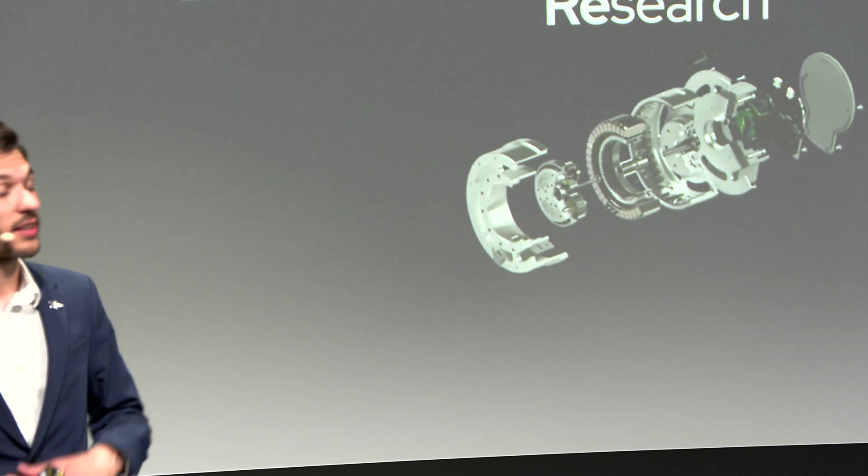2024 was also a year of drastic changes for the association with the creation of 2 new poles that broadened our perspectives. And so here we are now. The association is organized in 3 distinct poles that complement each other and enable a progressive learning experience for our members. The Xplore Challenge, our education pole, the European Rover Challenge, our international competition pole, and finally, the Xplore Research for advanced research projects in partnerships with industry and academics.

Throughout these poles, we aim to bring together passionates, willing to build and learn together, who also have an interest in space exploration and rovers. Thanks to our initiatives, we train the next generation of engineers to be proficient in real-world scenarios. They gain a true hands-on experience that forges their capacity to play a key role in the teams that they will integrate and be autonomous. And we see that this has already borne fruits.

The experience they had at EPFL Xplore allowed many alumni to integrate top-tier companies and institutions for their internships, master theses, and jobs. And this trend does not only apply to space-related fields, but to a wide range of engineering domains, thanks to the diversity of our team. We have more than 120 students contributing each year, coming from 5 institutions with more than 12 different specializations represented, ranging from robotics to electronics through economics, just to name a few.

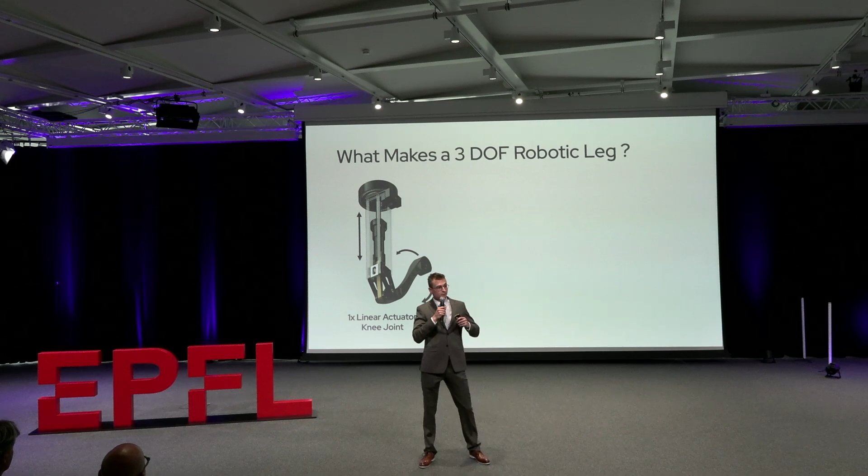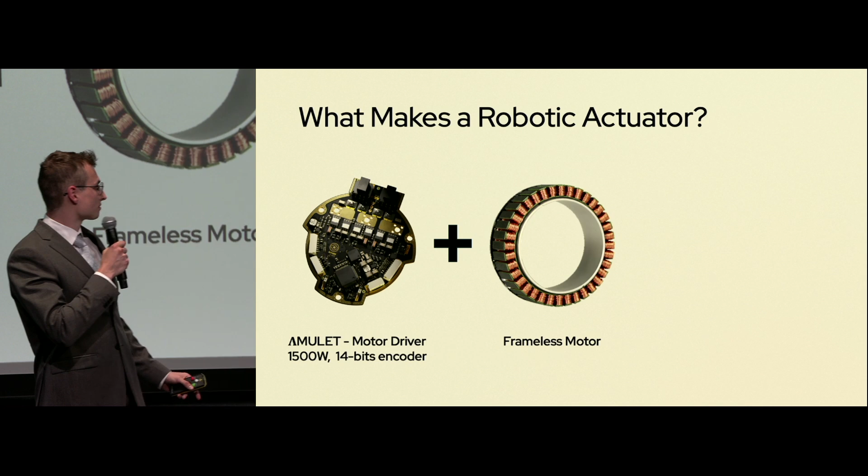So now the next obvious question is, what actually is a rotary actuator? Well, it's composed of 3 main parts: 1 custom brushless DC motor driver with an integrated encoder, 1 large frameless hollow brushless motor, and 1 reduction system, in our case, a single-stage planetary gearbox. You bring everything together in 1 single custom enclosure, and you get a rotary actuator.

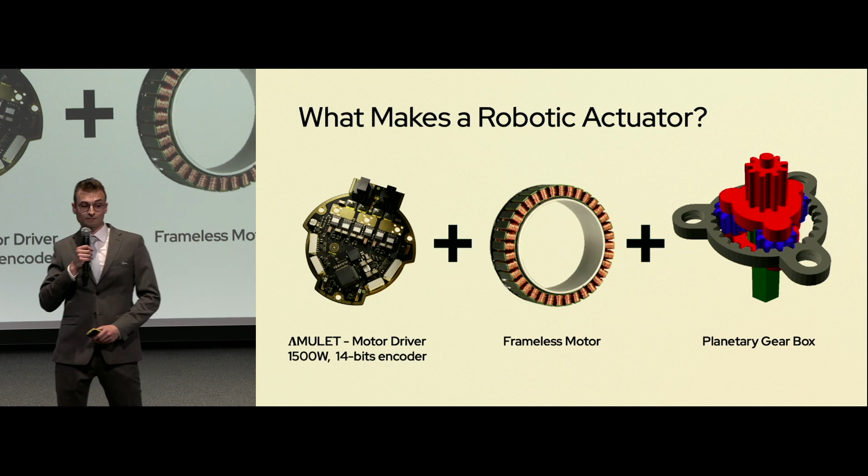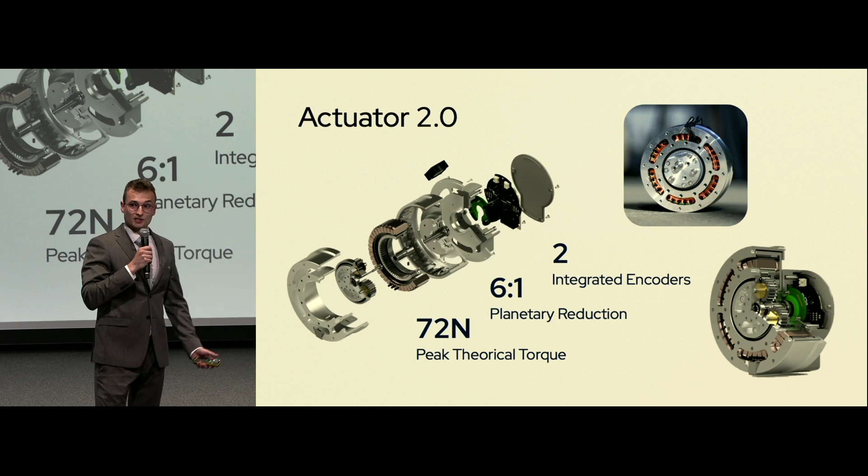But then you might ask, what is a new actuator without a new leg? So that's exactly what we did, and we built a new leg. So say hello to leg 2.0, a ball screw leg entirely machined in-house by students, 50% thinner than the previous iteration and 700 grams lighter. But most importantly, it is now pretty much backlash-free.

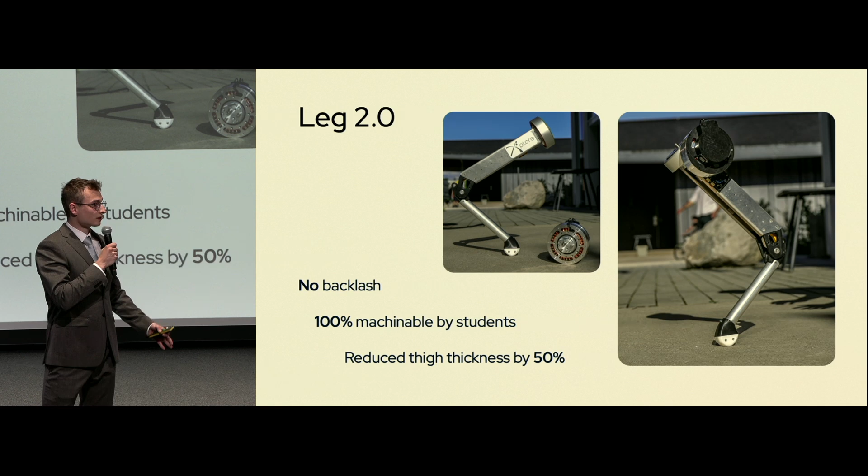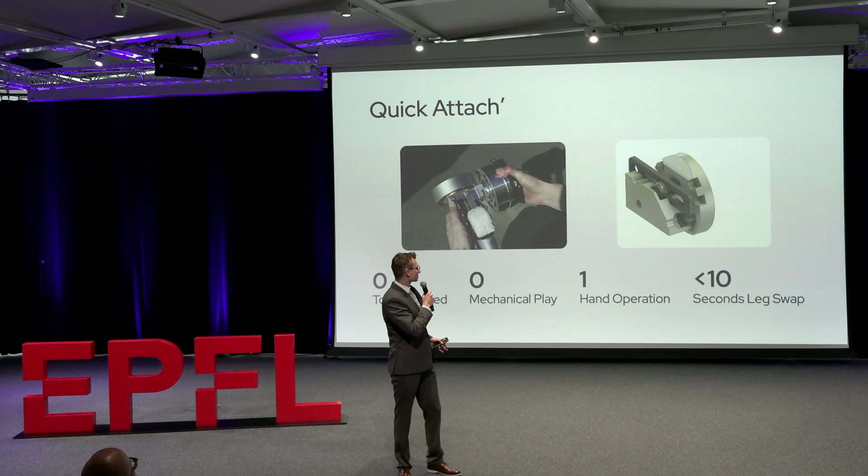And after building this new leg and this new actuator, the next challenge was to connect them together. And this is when a very talented student came up with an interesting idea, a quick attach system. This clever system is actually inspired by some 3D printers, and it allows effortless connection of the leg to the hip actuator by just plugging it in. You don't need any screws nor any tools. You just plug the leg, the power cables, data cables, and that's it. You're good to go in just a few seconds.

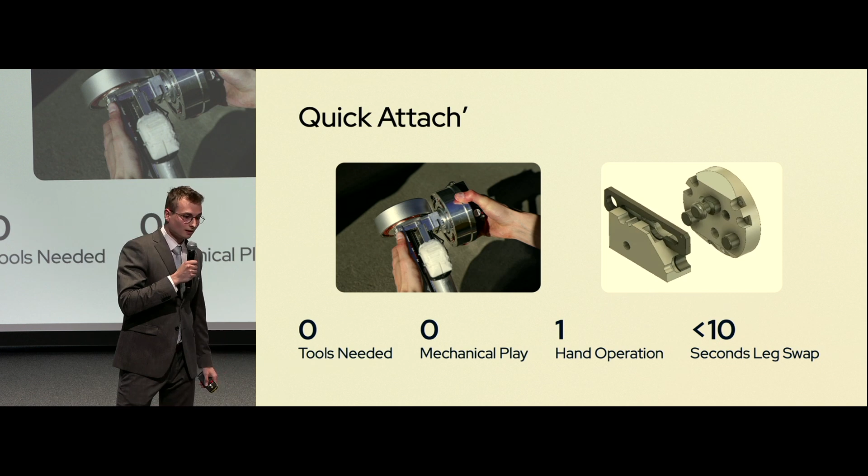And this system provides a strong and rigid connection, and like the rest of the leg, is entirely manufacturable in-house by us with traditional machining techniques. But that's not all. We also worked hard to develop the final piece of the puzzle to have a fully custom power system going from our batteries to our motor drivers. And now I'm happy to present you Battman, our new battery manager. It is designed to allow safe discharging, charging, and storage conditions of our batteries, and is powerful enough to accept up to 10-cell batteries for a power-hungry legged robot, but is also small enough to fit on the smallest battery packs.

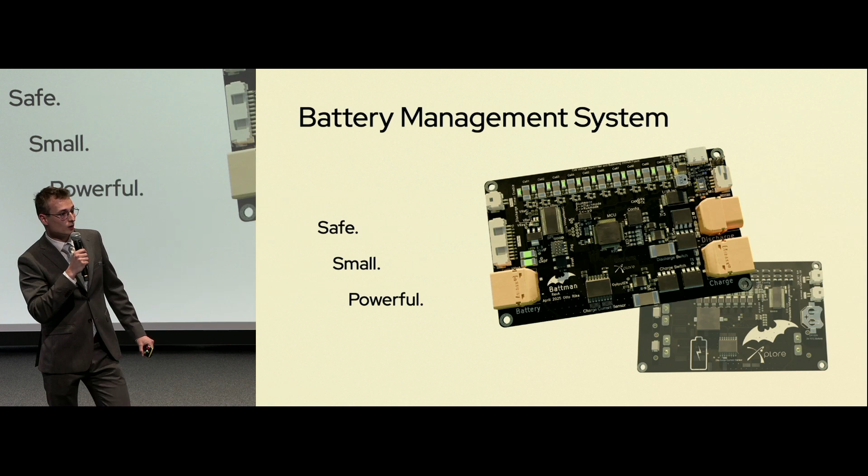But at Xplore, we're not only about building cool, fancy actuators and fancy tech, but also sustainable ones. And this is why I would like to welcome on stage Giovanni Aragna, who will tell you more about our plastic recycling initiative. Thank you.

Thank you, Theo. Now, let's finish this research pole with the Recycling Plastic project. This project was born from the idea that we could reuse 3D printed parts that were obsolete to create new filament. Its objectives were to be low cost, open source, and yet produce high quality filament. The machine works as follows. You first have a 3D printed part that you shred. After that, you dry it, and you put it inside an extruder. The melted filament that goes out is cooled by water cooling, and the diameter of the filament is measured at the end. After that, you have the new filament that is pulled and spooled.

This year, we aimed at implementing a closed loop between the diameter sensor and the speed of the spooling to better control its diameter. Uniformity of that is required by the printers. We also improved the spooler and wrote the software to control it.

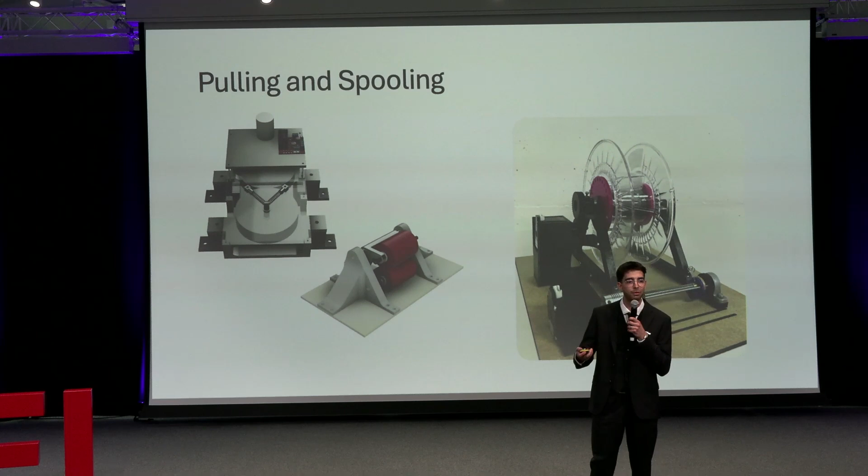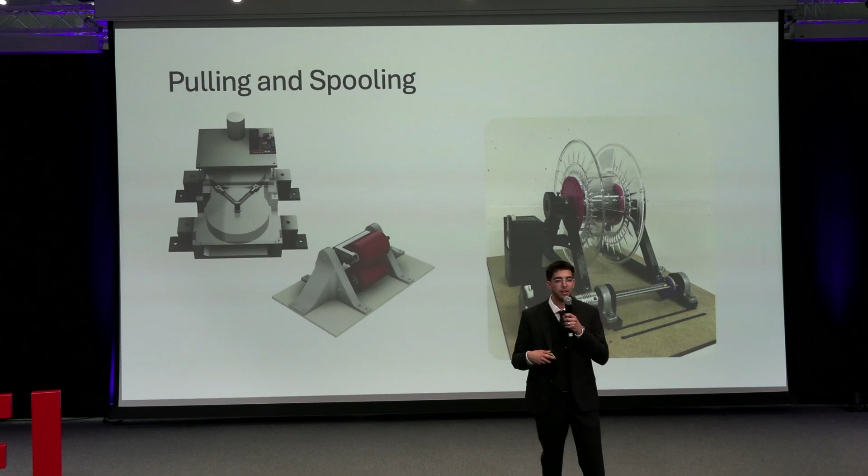Additionally, a dryer is being made. It aims to control the temperature and humidity and adapt its heating accordingly. It must limit energy losses and should be able to pour the material directly into the extruder, or it can store it. The setup must withstand 100 degrees.

Here is the first prototype. The air comes into the fan, is heated, and goes into a chamber where there is also the material. There is a mixer that ensures uniformity of the drying, and at the bottom you have a valve that permits continuous release of the material.

This project was thought to last 2 years and should be finished by end of June this year.

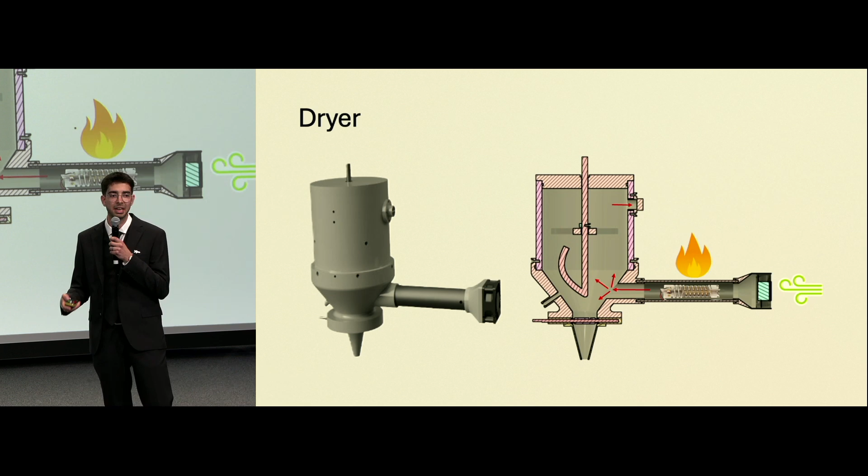Now you may ask what will be the next steps of our research pole. What do we want to do now? During these last 2 years, this pole has let us explore new horizons, experiment new things, and more importantly, learn. Working alongside companies and speaking with experienced people from EPFL about new technologies are just 2 reasons why this pole is so important. To continue on this path, and because our association is also a space for innovation, we want to extend this pole to new ambitious projects, but with a closer look on space robotics.

Instead of scattered initiatives, we're moving towards a unified and long-term research vision. We want to concentrate our efforts, bringing mechanical, electrical, and software teams together around concrete and application-driven challenges. Each project may stand alone, but they will all contribute to a shared direction, pushing the boundaries of what's possible for robots in extreme environments such as space.

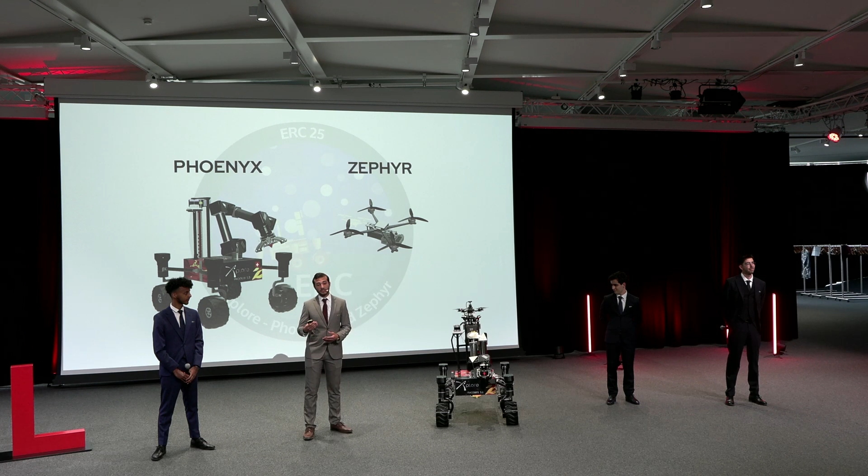At the ERC pole, what we do is create and build 2 robotic systems. The first one that you just saw is Phoenyx, a robotic rover capable of navigating using a four-wheel independent steering and driving system. It's also equipped with a manipulator, a 6 degrees of freedom robotic arm, for maintenance tasks. In addition, at the back we can see a shiny drill capable of drilling 30 to 40, and even 50, centimeters deep below the surface.

But we don't only stop at that. At the top, you can find Zephyr, our drone, which is equipped with machine learning models to help it autonomously navigate and provide information and area reconnaissance to the rover where it cannot get.

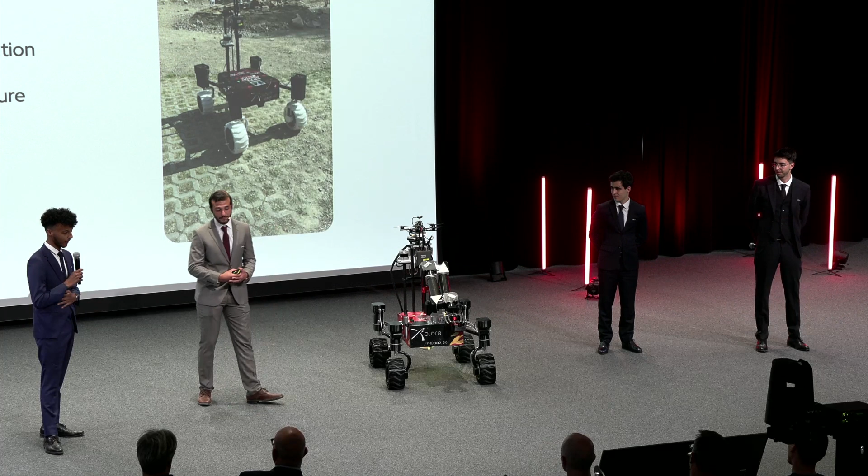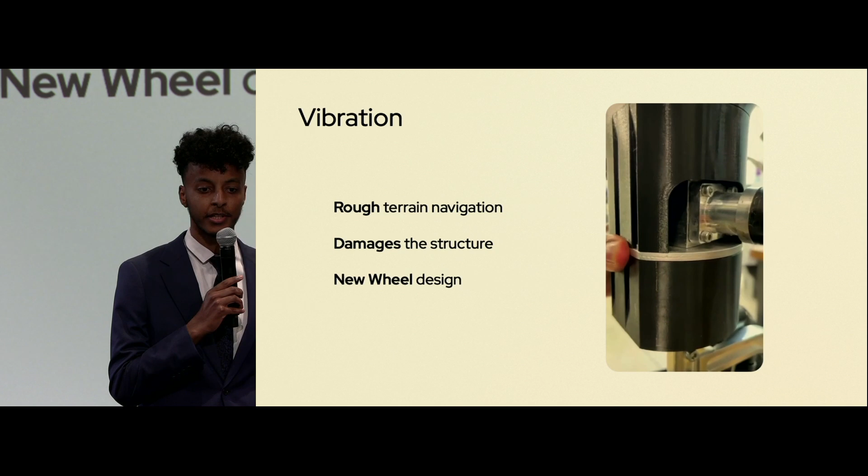Thank you. As you have seen earlier, we work every year to improve our rover design. This year's main issue we encountered concerns vibrations. The rover tends to vibrate a lot, and that isn't something nice to have in a mechanical system. So let's get into the work achieved this year to address this issue.

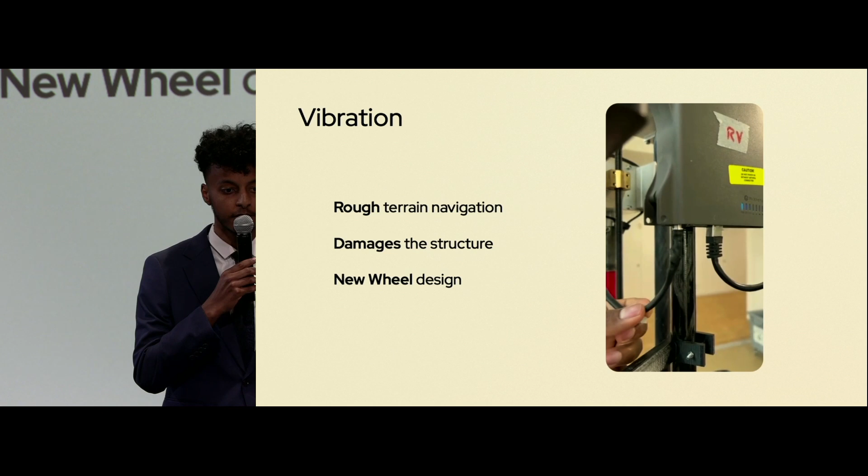The rover vibrates a lot while driving over rough terrain because it is not equipped with a proper damping system. Every time it moves over rocks, these vibrations cause both mechanical and electrical issues. Screws tend to loosen, and even electrical connections can be weakened or, even worse, disconnect.

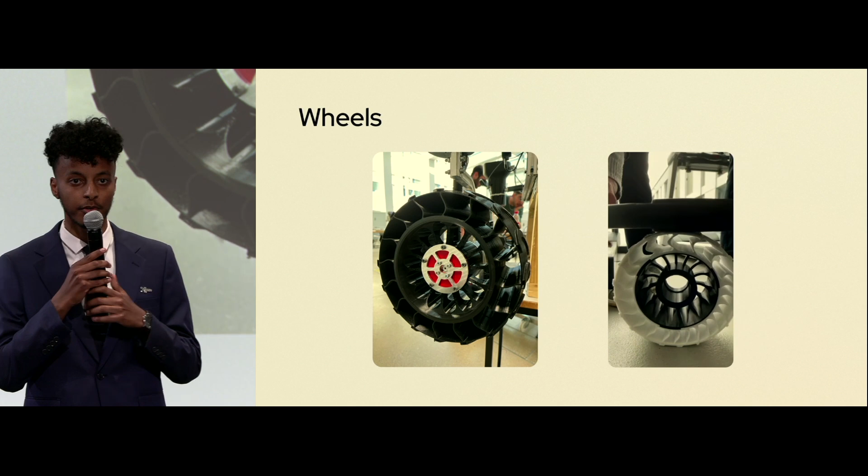So to tackle this, we first measured the rover's vibrations to determine where the main vibrations were occurring. Once we had that, we chose to iterate into a new wheel design to mitigate the issue at its source.

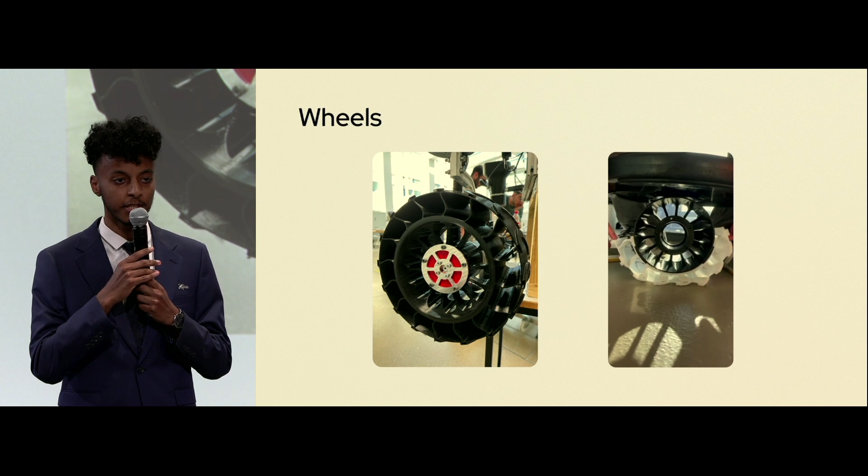However, we can always imagine that a body without anything else will not work. We need data transfer, we need neurons in a body. And for that, we have Elliot to explain our electronic architecture.

From the very beginning, our emphasis was very clear: global system cohesion. Every decision taken, every line of code written, every cable routed was done with one objective in mind: integration.

The result? A system where each subsystem acts as an intelligent black box, self-contained, modular, and in lockstep with the control station. Now, this paradigm allows us to move in parallel, with the hardware and the software evolving side by side without stepping on each other.

All subsystems stand alone, but move in parallel. This decoupled architecture doesn't only speed us up, it empowers us to innovate at every layer, at every stage.

Now, it's not only about elegance, it's also about pragmatism. Each module in the rover is designed to be rapidly removed and unit tested, allowing our team to execute high-intensity stress tests, identify points of failure, and refine with surgical precision. Debugging becomes faster, testing becomes more intelligent, and progress becomes exponential.

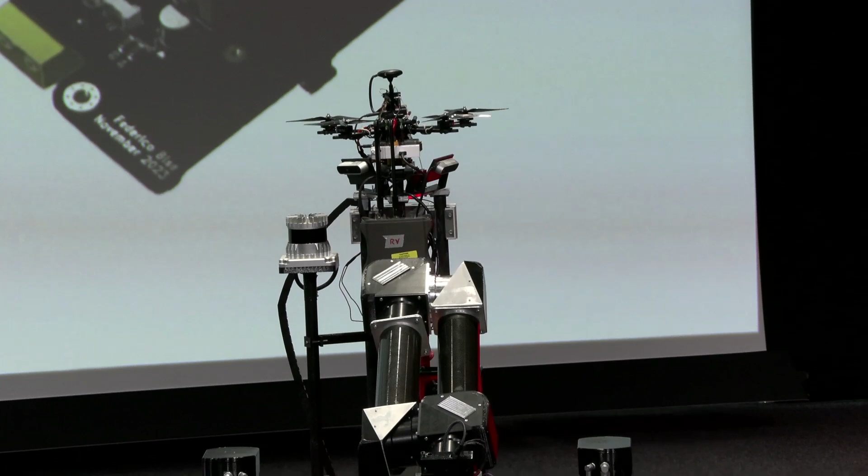Now, we've also reimagined cable management, turning an afterthought into the basis of solidity, of stability. With this rover, each component stays in place, even under the most demanding of conditions. Minimal rotation with maximum reliability.

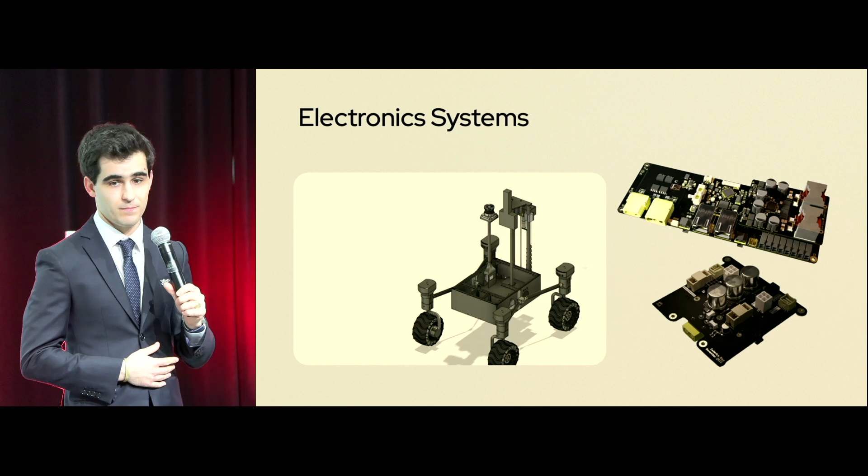And now, probably most importantly, we've embraced the ethos of plug and play. With this rover, you take a component, you plug it in, there is no step 3.

Now, at the core of the rover is a single unified power source, a custom 8S 4P custom battery pack that's been rigorously field tested and proven under high-stress situations.

For the first time, the battery never has to leave the rover. We've created a custom charging board, eMux, capable of delivering safe, in-place charging. It's easier, it's safer, it's cleaner, and it removes all handling errors.

The rover becomes like an iPhone. You plug it in, and it's ready to roll.

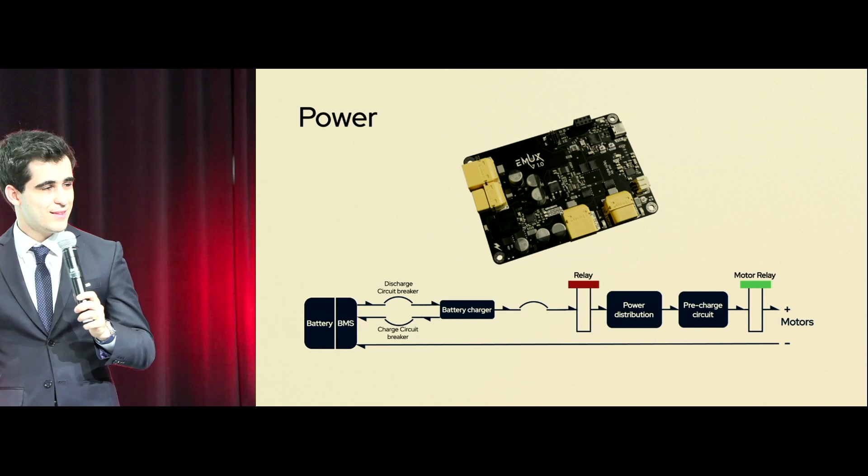Now, beneath its sleek exterior beats an industrial-grade safety system. Picture a trinity of a 40 amps IEC-compliant circuit breaker, an automotive-rated relay, and a UL508 emergency stop. 3 layers, 1 mission: protect the rover.

Now, just like everything else we do at Xplore, we don't just engineer for the solution, for the specifications. We engineer for another planet.

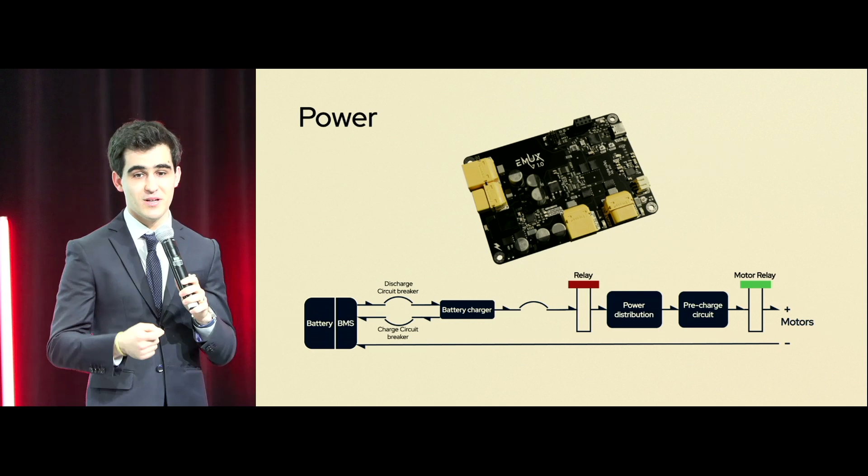Autonomous emergency shut-off achieved in under 2 milliseconds. The secondary isolation circuit decouples motor controls from core systems, allowing us to maintain clear and immediate access to all components at all times. And finally, an integrated suppression hardware system protects electronic components from voltage spikes and electromagnetic interference. And to further harden the pipeline, we've introduced a pre-charge circuit, gently ramping up downstream capacitance, taming inrush current, and preserving hardware integrity.

Now, this isn't just a safety system. It's a carefully orchestrated defense organism. Every place, everything is protected. Because on Mars, there are no second chances, and that is our objective. Power isn't just flowing through this rover. It's alive, it's intelligent, and it's ready for what comes next.

And yet, electronics are not only the main thing. However, because without intelligence, it's only wasted energy. So to explain more about the intelligence in the system and the brain behind every decision we have made, and every decision that the rover and drone takes, I'll let Giovanni.

5 years of software development brings a lot of challenges. When many hands shape a project across the years, complexity tends to accumulate, systems become harder to understand, and code becomes harder to maintain. This is why this year we've focused on 2 things: maintainability and robustness. We want future members of the association to easily understand and improve the work that we deliver today.

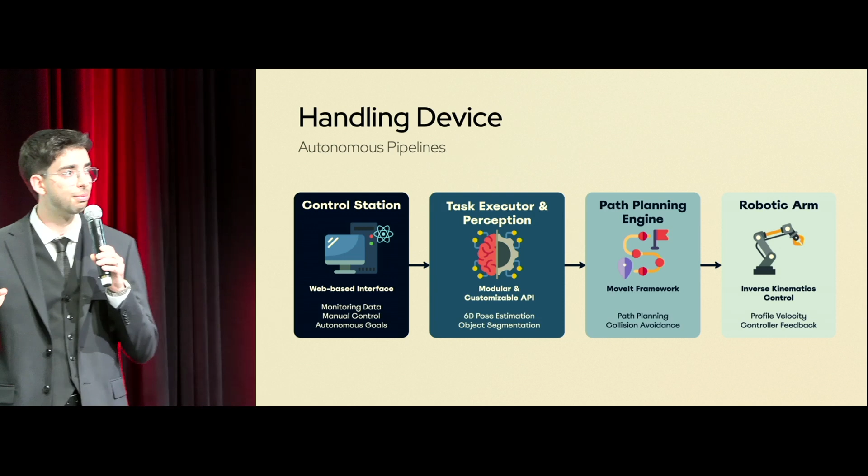Now, speaking of autonomy, our robotic arm benefits from a completely new pipeline of commands, more modular and easy to use. The idea has been to reduce the number of tools that we were using, and at the same time complexify our software architecture to have deeper control of the robotic arm with ROS.

In the end, we've connected 3 different worlds into one seamless experience: a beautiful control station where missions are designed and launched, a new decision and perception-making layer allowing the rover to understand objects, compute their positions, and plan what to do next, and finally, a refined implementation of the path planning framework we use, called MoveIt, that turns these decisions into safe and efficient motions in 3D space.

But that's not all. This year we've gone very deep, rewriting the very core of how the arm moves when manual control takes place. We've designed a full custom inverse kinematic engine, allowing us to move the gripper wherever we want. And with our new velocity control, every motion feels smoother and incredibly precise.

To ensure such smoothness, we also needed to work into the hardware. So here is the latest iteration of our robotic arm, where we focused on 4 main areas: ease of assembly, structural rigidity, backlash mitigation, and dynamic performance.

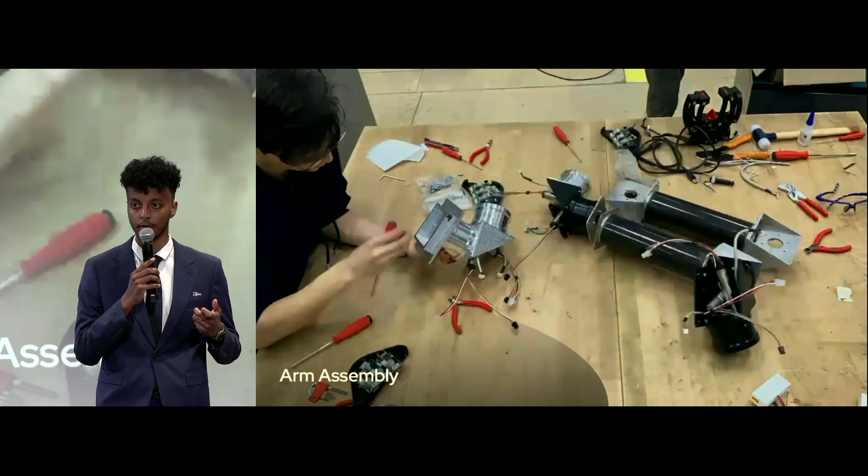One of the major focuses for this year's design was to improve manufacturability. With the exception of a single part, the entire arm can be manufactured in-house. This not only allowed us to operate on a tighter budget, but also provided great opportunities for team members to engage in fabrication-oriented design.

Concerning the transmission, we opted for a cycloidal drive as shown on the video. We have an 11:1 gear ratio at this stage, which allows us to have a higher torque while reducing the speed. We also worked on reducing the backlash, since it was a major problem we faced last year. By adjusting the diameter of the brass bushings, we were able to control the backlash and fine-tune it for each joint to keep it as low as possible.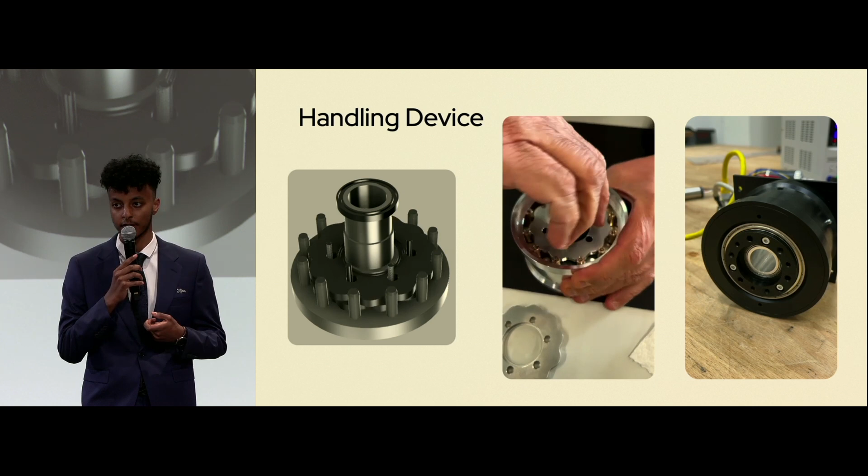And finally, concerning the actuators, they have also seen an upgrade by selecting motors that are more appropriate to the arm's operating point. We were able to increase speed by a factor of 3 to 10, while maintaining the same torque required for high dynamic motion.

Obviously, the rover has to localize itself. Our main tool for that is called a Kalman filter. It's an algorithm that combines past observations and noisy measurements to produce the best possible estimate of something that changes over time, like position.

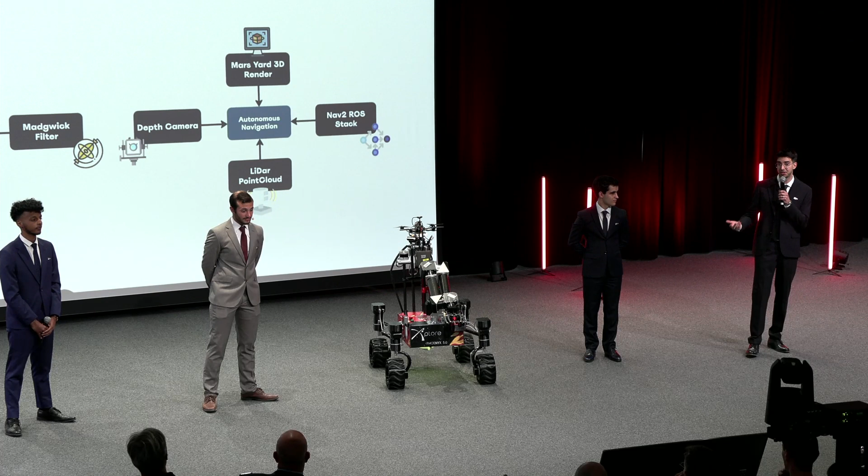We use an extended version of it through sensor fusion with, for example, IMU data and wheel odometry. This year, in this fusion, we also have our front camera that uses a new visual inertial odometry, giving us an even better estimate of the rover's position.

In a dynamic way, we also continuously map the environment around our rover using our LiDAR-based system, and it works with an obstacle detection layer. To better capture the LiDAR information, we use a new LiDAR inertial mapping library called GLIM.

And when the rover wants to move from point A to point B, in the end, we use a hybrid A-star planner completely designed inside the navigation stack of ROS. Our autonomous navigation has been intensively tested through real-world applications and environments, such as under unpredictable lighting and realistic terrains, and we use these trials to make major design decisions.

Finally, to bring this new level of control, we are proud to introduce our 2 new compute units. They're 2 Jetson Orin NX modules. They're small, they're powerful, and they're energy efficient.

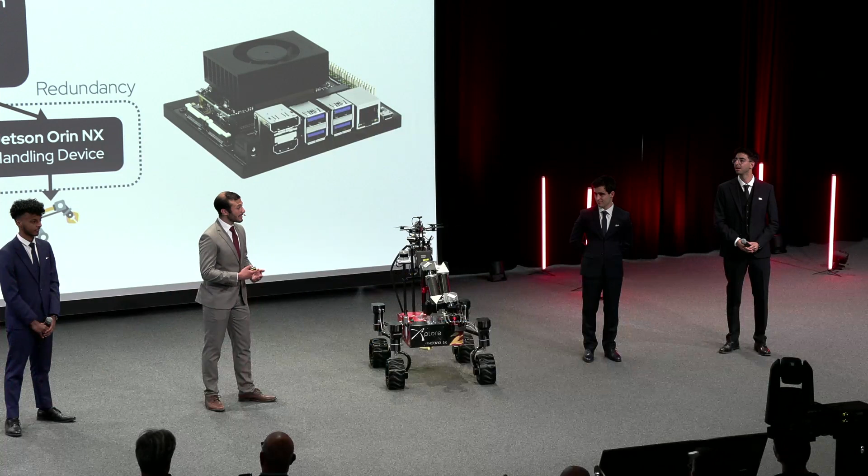Yes, of course. ROS stands for Robot Operating System. It's the main set of tools that we use inside our software stack. Its main goal is to share data between software systems. The core idea is that any piece of code running on the rover's network can communicate with others if they both use ROS, and these pieces of code are called nodes.

Our main node is the rover node. It acts as an orchestrator, meaning it receives and dispatches every command sent between 2 subsystems. So it acts as a central and security entity. Having every component using ROS is a key objective if we think about robustness and scalability.

Actually, only the avionics node is not integrated with ROS. Indeed, in the past, the avionics pipeline was quite fragmented, with disparate modules, too many moving pieces, and a complexity that resisted global system cohesion.

Which is why, this year, we're engineering a brand new next-generation avionics pipeline with our very own new custom board, which was purpose-built to host another custom ROS node natively on board. Now, with this system, every actuator, every system, every sensor on the rover will act as a first-class citizen in the rover's meshed network, streaming real-time data in a single unified communication pipeline.

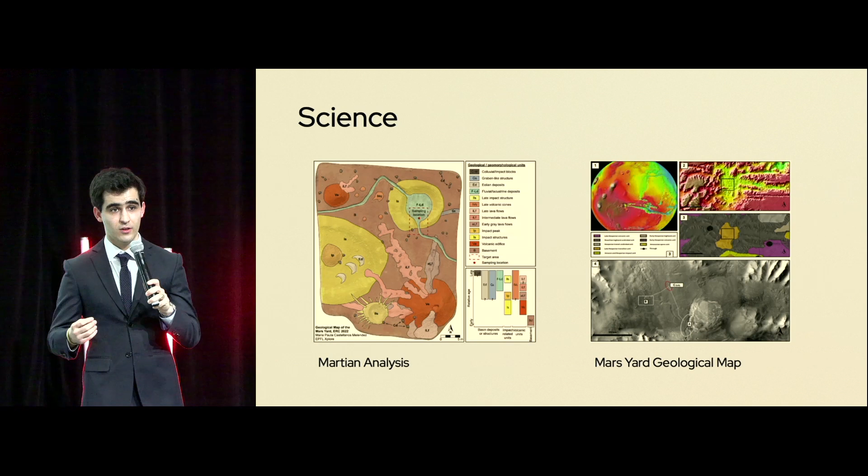So each year, we create detailed geological maps of the Martian terrain we're trying to study and discover. By identifying key features and landmarks, we're trying to see how that terrain will evolve over millions of years on Mars. Our analysis is based on real-world scientific data, using studies that actually reflect the Martian terrain we're trying to study, and this year, it's the largest canyon in the solar system.

So, merging everything that we mentioned together, as well as working with the AI team, we can imagine things that even conventional robotics cannot do. Allow me to demonstrate.

Phoenix, give us a turn.

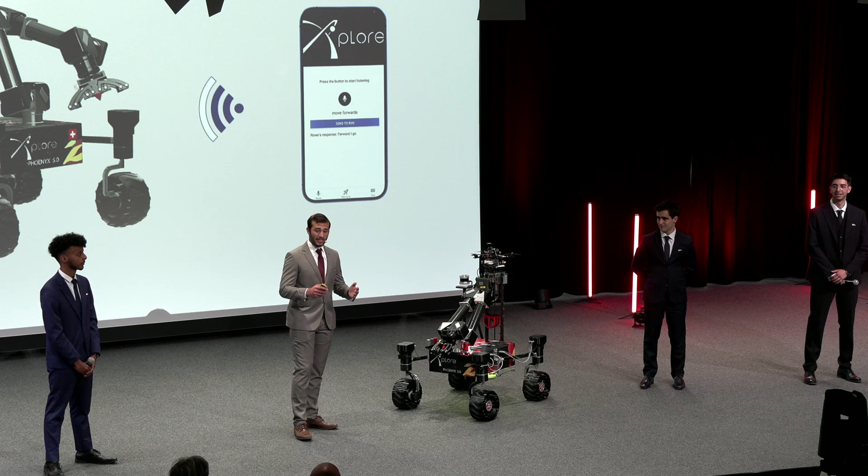So, that's it for Phoenix. He's taken the time a lot. Now, we move on to Zephyr, our drone that we have forgotten for a bit. Every layer in Zephyr's architecture has undergone significant improvements. Let's start from the bottom up, taking at the bottom the landing mechanism, in which we have been inspired by skis, creating it from a mixture between PETG and TPU. Ensuring robustness, we have the PETG, and then we have good shock absorption.

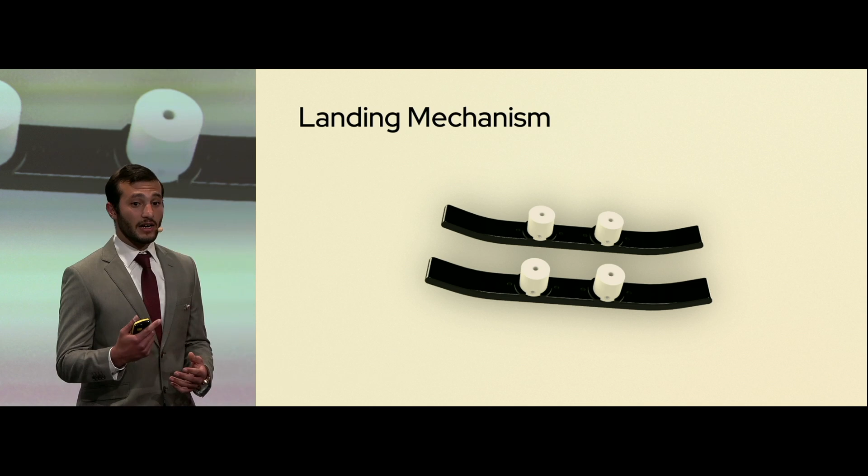The redesign of the landing mechanism kept in mind the maintainability and fast replacements in case of damage or other rough landings. Just on top of that, we find Zephyr's brain, a Raspberry Pi, that will be doing the computations and running machine learning models. Their goal and target is to detect different objects, locate them, locate itself, and help navigate autonomously from and back to the base as needed, or in our case, for the ERC competition.

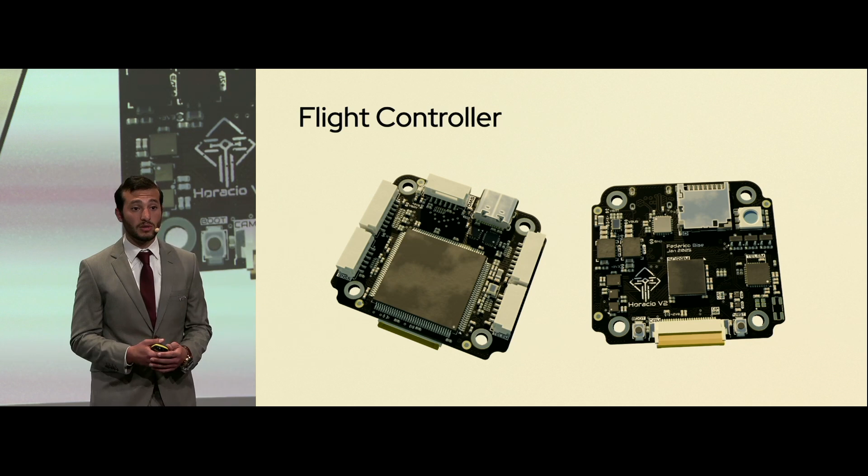At the topmost level, we are near completion of our own flight control board. It's called Horacio. If you ask what this board is, the board is basically our sensor fusion. That's the board that takes all the sensor data, all the information, and computes the control signals, and then sends them back to the actuators, back to the motors to effectively do the task.

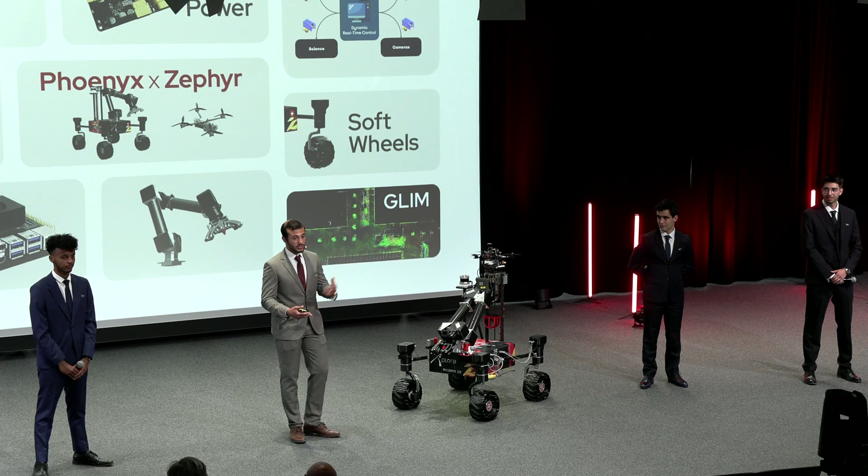Thank you all for your attention and enthusiasm. I hope going through the European Rover Challenge, our team has shown you everything that motivates us and that pushes us forward. However, let me just give you a quick recap. We've talked a lot about a lot of things: rover, drones, Zephyr, ARM, drilling, and everything. However, the main thing to keep in mind is we work together. We work as a team. We learn, we fail, we learn, we move on, and then we succeed. And for that, we're trying to take everything that we learn inside the classrooms, inside the university walls, outside, and then to compete on the world level, the international level, at the ERC Poland.

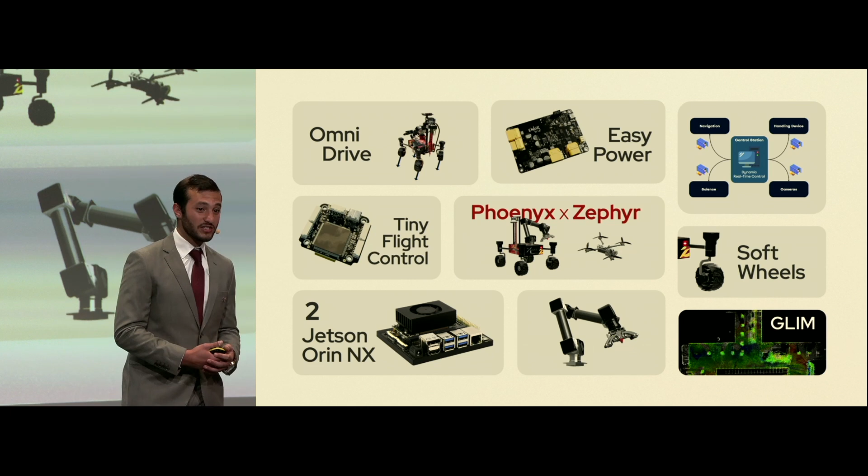So thank you so much for listening to us. Thank you so much. I hope we interested you enough. And now I'll leave the closing word to our dear president, Ugo Balducci. Thanks. Thank you very much. You see this, an incredible job, and we're very proud of our new rover and drone. So that's great. But finally, we now reach the end of our presentation. So I hope you really liked it.

We would first like to express our deepest gratitude, starting with MAKE, which is the initiative we're part of. It's incredible because here at EPFL we can grow thanks to this framework. It gives us a lot of support, funding. So I would like a big round of applause for MAKE. Thank you very much. Without any place to work, without any workshops, we wouldn't be able to do anything, to manufacture anything. So I would like to thank the Spot, which has been very welcoming for the spaces that we can use, and all the different workshops at EPFL that enabled us to manufacture our pieces. So a big round of applause for them too. Thank you to coaches. We have a lot of projects, and also we collaborate with academics. So multiple labs are part of the adventure. So I would like to give them a warm thanks.